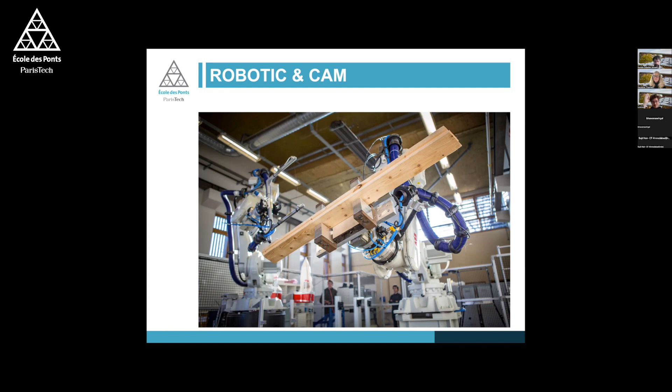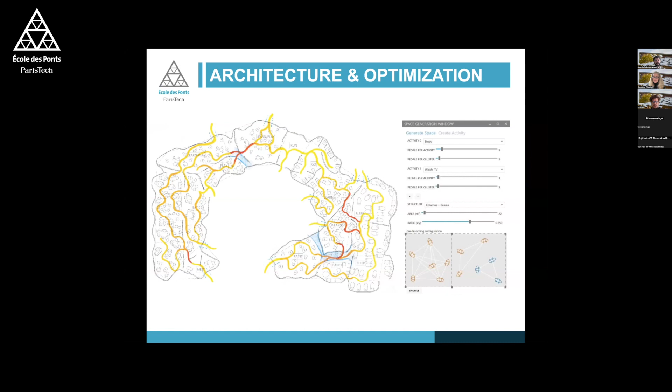to do innovative prototypes for construction. This picture illustrates a very important theme that we call construction-aware design, when we try to ease the construction of complex geometries with the help of mathematics, geometry, but also innovative prototyping. It's also a place where we do architecture in an innovative way. You can see here the results of one student's thesis. That's an illustration on circulation optimization inside the project.

So the master is 1 year and a half, but exactly 1 year of courses. You have first 4 months of full-time courses inside the school to learn the tools and to learn the theory behind all of this. And then the second semester, you go in a company and you work part-time at school 1 week a month to do either computer-aided manufacturing workshops or computer-aided design courses.

So just to give you some examples of what we can do with manufacturing. So there is a workshop on robotics, on large-scale 3D printing, on wood, on innovative assemblies, and something linked to reuse. And we also learn architectural geometry, machine learning, optimization, and innovative structural studies with form finding. So this is just a glimpse of what we do, but I think the best is to let alumni talk about their experience and show what they have been studying.

So Leah, unfortunately, will not be able to be here, but I think we can directly go to Julien, if we keep the order, and if you are okay, Julien.

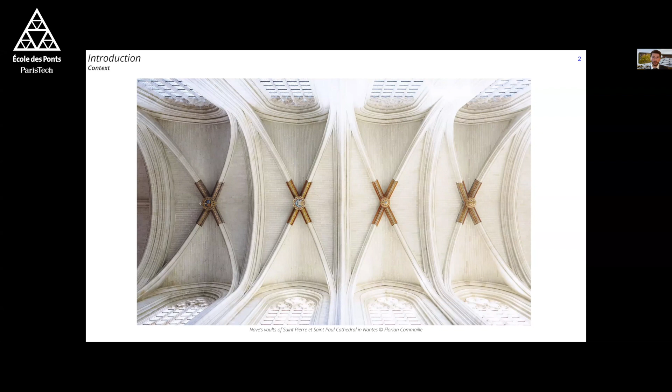For example, with the point cloud, you can have access to very precise geometric information that you can use for your 3D model. For example, on the left, you have the result of a parametric process which takes as input the geometric data obtained from a point cloud and makes it possible to model the geometry of any rib vault and to export it in a finite element analysis software. So you can see this model is really precise in terms of global geometry, but we don't have the representation of each stone, of each ashlar, and so it's not a discrete model.

On the right here, in contrast, you have a work which is focused on discrete structural modeling. However, the geometry of the vault is not based on a point cloud, and the stereotomy is simplified.

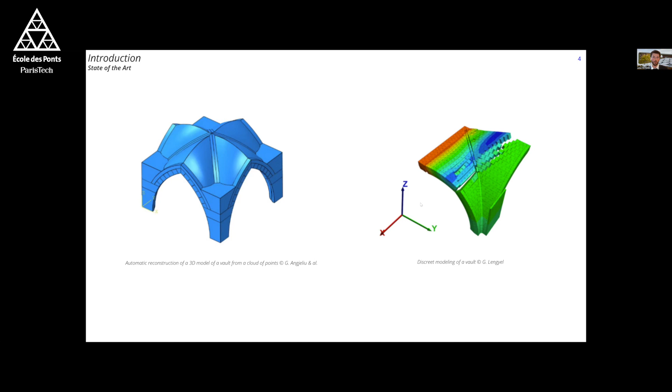And so de facto, this model is aimed at theoretical purpose and is not really suitable for a practical case. So in our opinion, the structural understanding of the vault cannot be done without a geometry faithful to the existing one, like in the model on the left, and also a representation of the stereotomic characteristics or discrete assembly of the vault. And so we worked to produce this kind of model.

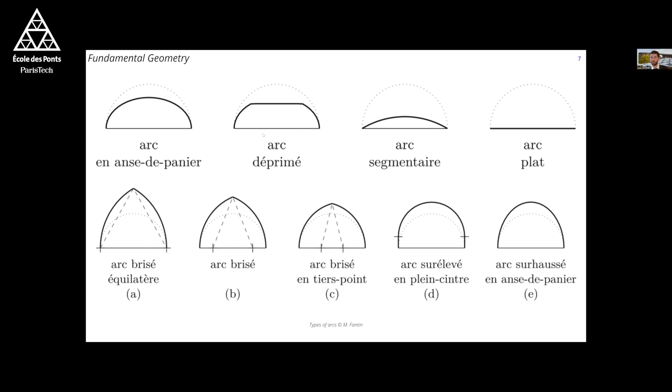So in an ideal case, this geometrical information can be obtained directly from a cloud point, or we can play with a lot of parameters to model different types of vault. So here just an example of the types of arcs that you can find in Gothic construction. There are a lot. And here some examples of the result for the fundamental geometry.

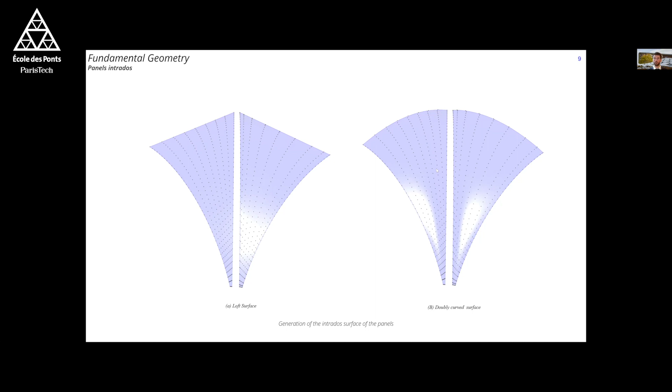So the second step is the modelization of the intrados of the panel, so actually the surface of the web. In Gothic construction, the panels are most often curved so that the block rows form arches, which make it possible to transfer the force of the webs to the ribs while facilitating the erection of the vault. So we implement this in the algorithm by curving the loft surface.

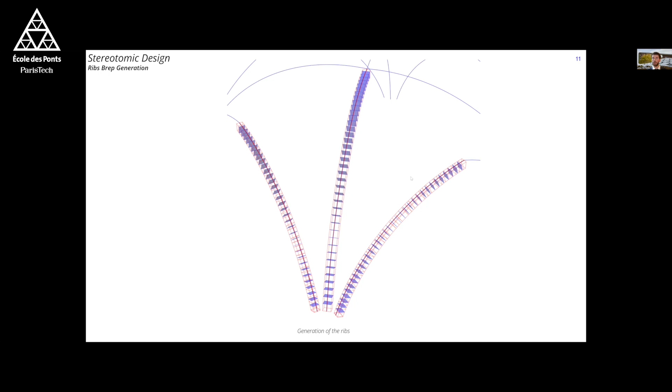And next, we have the stereotomic design. So the first step was to model the voussoirs of each rib, which is not so complex. We have some topological complexity also to take into account, but I'm not gonna dive into this.

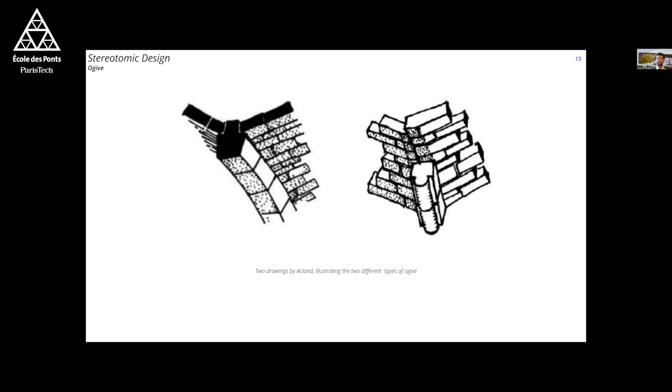And the next step is the question of the ogive. The ogive is the diagonal rib. In the literature, you can find two types of ogive: one with rabbets, and one case on the right, which is the traditional case. I'm gonna focus for the presentation only on the case on the right. The complexity for this type of ogive is the junction of the panels of the webs on the ogive.

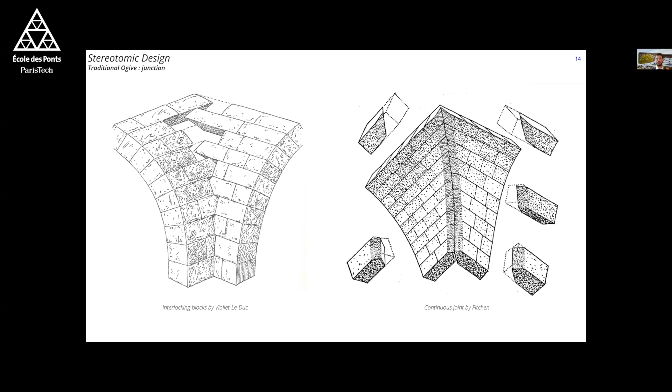In the literature, we can observe some debate. For some authors, the panels meet frontally like this and form a continuous joint. And for others, there is an interlocking system of the stones on the ogive. So to kind of settle this debate, we observed existing vaults and tried to understand how they have been built and what is the stereotomic pattern.

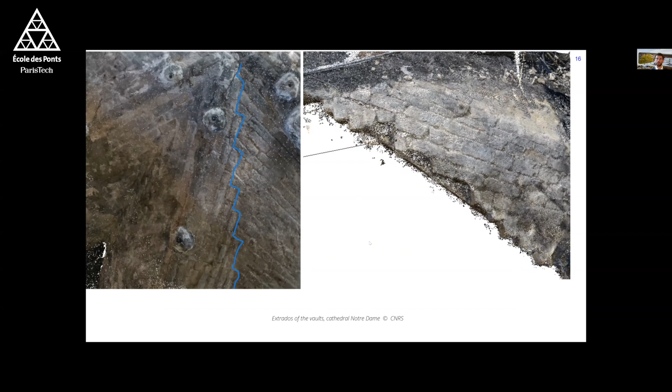So we try to reproduce this interlocking system in an algorithmic way according to local parameters. And finally, we start from this, and we obtain this geometry where we can find the main characteristics that we observed on the existing vault.

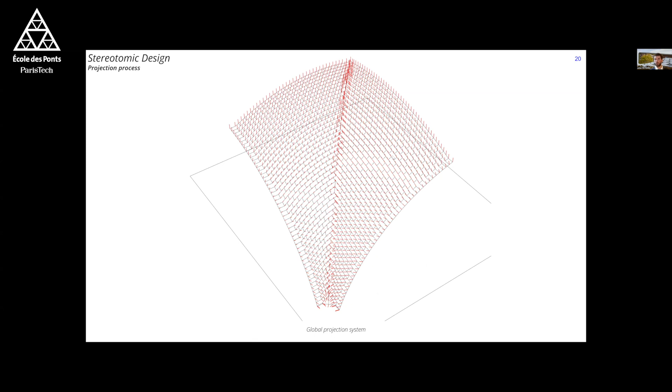Then we start the projection definition. The idea is to define a global projection system in order to obtain a volumic model. We base this algorithm on historical study or on what we observe in the existing. And here, for example, you have the surface of the joint, and finally, the volumic model.

And here an example of an application. So we start from the cloud point. This is the cloud point of the Basilique Saint-Donatien in Nantes that I did myself. So it's not really precise, but it's okay for the example.

And here you have the superposition of the model with the cloud point. So it's not perfect in a mathematical way. I don't run an optimization algorithm to fit perfectly, but we can see that it's quite okay.

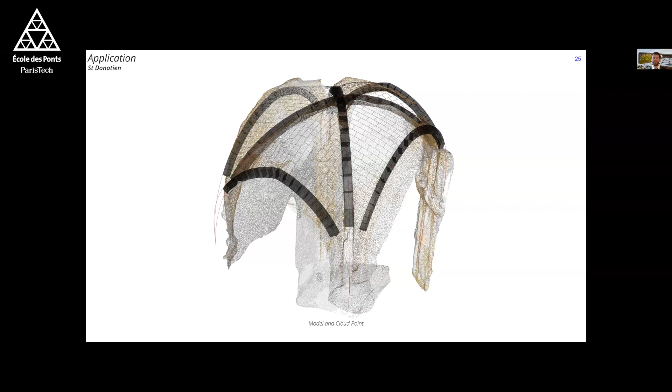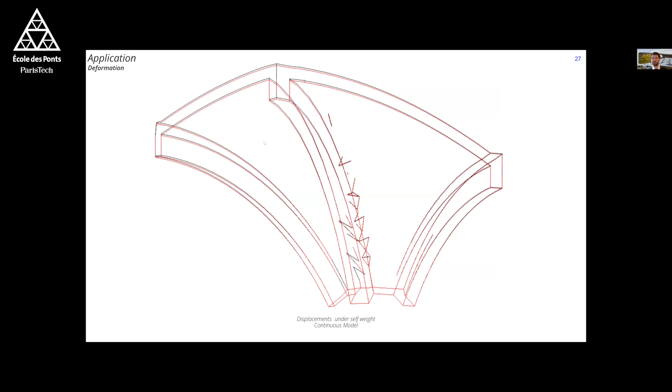And finally, there is export to the finite element software, which is a custom one. Here you can see the meshes of the blocks, and also in red, the meshes of the joints to allow the sliding of the blocks, so a discrete model. And finally here an example of the deformation and the von Mises stress. I have to mention that this is a continuous model because the calculations are quite heavy for a discrete model.

After a few years of being self-taught, I decided to follow an education that could advance my exploration. And so I decided to attend the Digital Building Design Master Program. As part of the master program, I carried out research in collaboration with XtreeE on a 3D printed concrete acoustic wall. The focus of this research was to be able to design and fabricate through robotic 3D printing and computational design tools a self-supporting acoustic wall that improved the acoustic qualities of a room through acoustic diffusion phenomena.

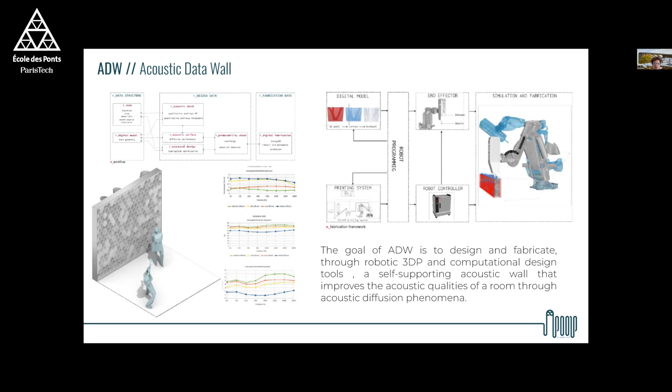Computational design and robotic 3D printing combined in a single workflow enable seamless digital design and fabrication, minimizing errors. Once the design and printing parameters were established, I was able to print a prototype of a portion of the wall in order to validate my investigation. From this experience was born Poolp, for Plastic Loop, a young startup created just under 2 years ago. Poolp has two founders. One is me, and the other is Thomas Sicuri, also an architect and Digital Building Design master alumni.

Poolp was born from a simple question. How do we value the mountain of plastic waste that human activity produces every day? The idea is to be able to use plastic waste as a new raw material, because we are all aware of the problem of plastic waste and its negative impact on our planet and our health. And we are all aware that this problem is largely generated by an economic model, a linear model based on mass production. Poolp, 2022 winner of the best innovation for additive manufacturing, addresses this issue by using plastic waste as a raw material for a circular and sustainable additive manufacturing.

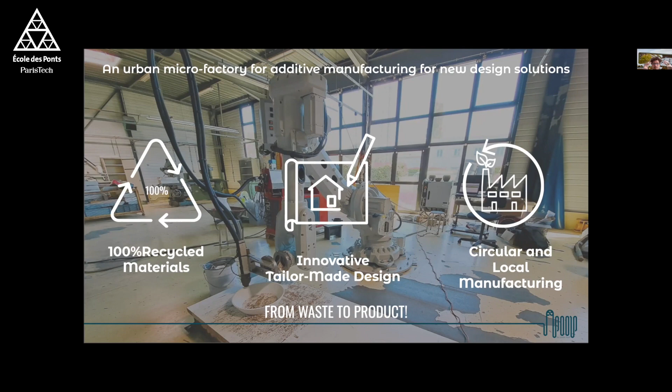Poolp is a new urban microfactory specialized in large-scale 3D printing and ecological transition. The microfactory is a small production center located in the dense urban landscape to boost the local economy and create synergies between the different actors of the circular economy sector. Each microfactory is composed of several additive manufacturing units. It's the 3D printer machine, capable of transforming plastic waste into high value-added products. With Poolp, we want to reshape the additive manufacturing industry, shifting toward a more sustainable and post-carbon future.

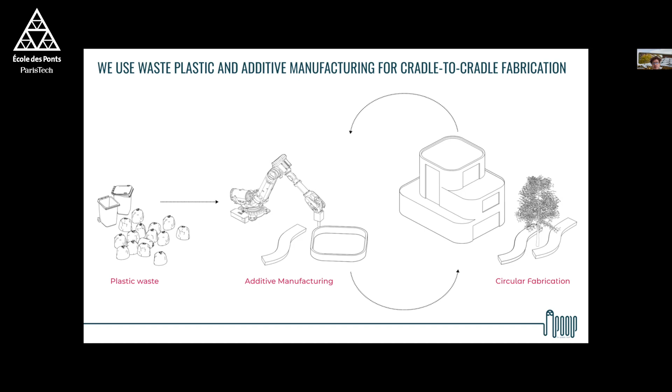We offer a co-design service and fabrication service. We accompany our clients throughout the creative process, from the idea to its realization. We work in synergy with our customers to create a unique solution, designed, tailored and manufactured in France.

Actually, we have realized the first prototype of the additive manufacturing unit, the 3D printing machine. We took existing industrial machines and transformed, adapted, and assembled them to create our 3D printer, which consists of a printer head mounted on a 6-axis robot that, by moving, is able to transform a more or less complex virtual geometry into a real object with precision and speed, and an industrial extruder into which the material is fed.

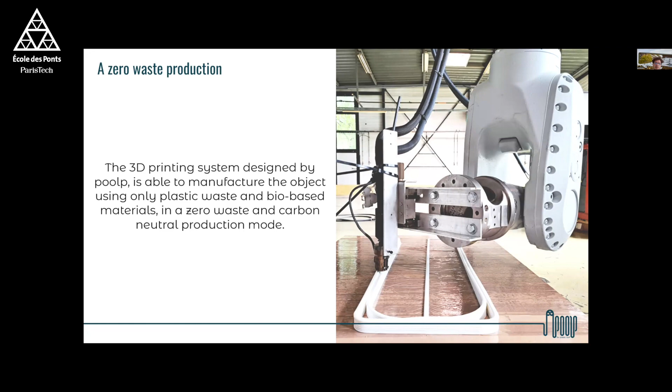This system allows the use of a wide range of post-consumer and post-industrial plastic waste. We can use almost any thermoplastic polymer. Unlike commercially available 3D printers, we don't use filament to print. We directly feed shredded material. You can see this in the photo. This has many advantages in terms of environment and cost, because our material is less processed and cheaper, and we can print faster. Currently, we use mainly post-industrial waste from food and pharmaceutical packaging.

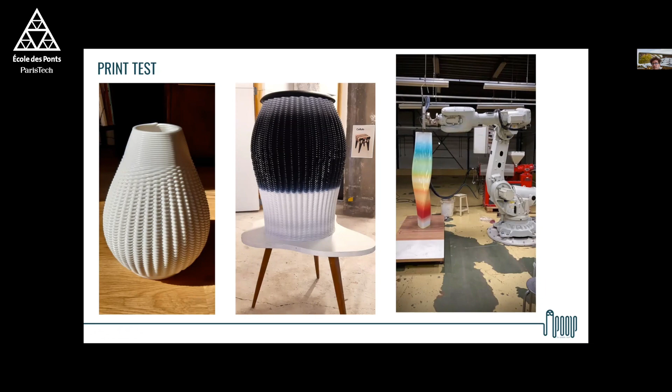Here you can see 3 different tests. These tests were done to find the optimal printing parameters, understand how the material reacts, and also understand the limits of our system. These 3 tests are made at different scales. The first one is 20 centimeters high. The second is double, it's 40. And the third test is the big one, almost 2 meters. It's a lampshade, the last one.

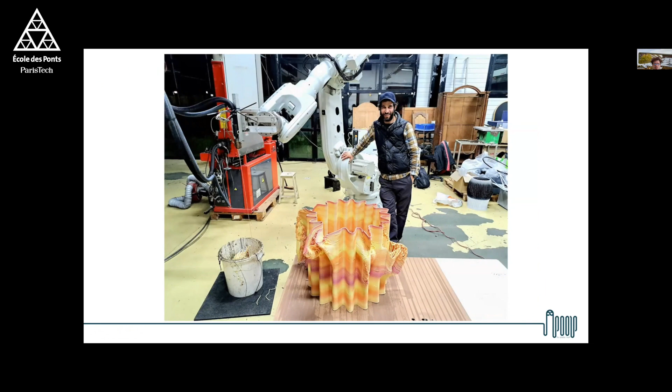Here you can see an artwork we made with an artist in the photo. This work was exhibited at an art festival in the Paris area. You can see the video. It's accelerated. We don't print so fast.

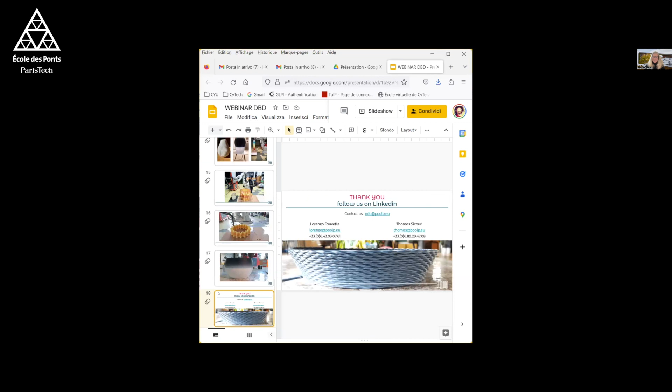So maybe we can keep on presenting unless somebody wants to ask something, but yes, maybe we will have questions by email after this recording. Yes, it's possible for us to answer one by one.

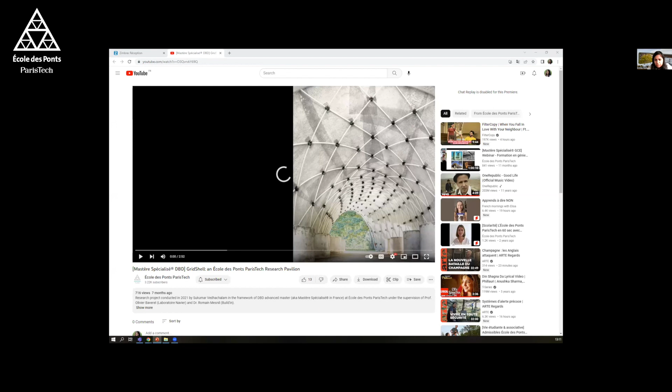Krittika, would you like to? Yes, yeah, of course, I'm here. Yeah, thank you very much. So I'll just share my screen. Just a second. Okay, I hope it's visible. Yes. Okay. All right. Perfect.

I'll go on. Hello, everyone. I'm Krittika Walia. I come from India, and I'm an architect from there who worked in Delhi for 5 years. And after that, in 2019, I came here to Ecole des Ponts to attend digital building design, and I finished my master in 2021. Currently, I'm working at Ecole des Ponts itself at the building co-innovation lab as a research assistant. And today I would like to share my thesis work and my professional journey one year after the master.

So, at DBD, my master thesis was about building a concrete shell using fabric membrane and telescopic arches as the formwork. As we all know, building complicated structures like these, especially with double curvature, is quite difficult to fabricate, mostly because of their formwork system. And since their formwork is unique, it requires a lot of material which generally goes to waste after a single use, and hence it's not sustainable.

So my hypothesis was to have shell forms, especially negative curvature, that can be built out of fabric as a formwork material, and I intend to reuse it. The key features of my project were that it should be a hybrid formwork, because I need to hold the fabric somewhere. Then it should be removable and reusable, of course, and the entire system should have a quick and easy disassembly with simple connection systems.

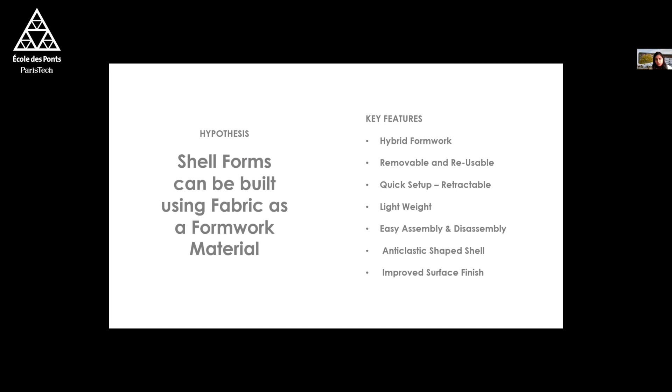So we proposed this idea along with the telescopic arches, which can be smoothly removed from under the built structure, which I'm going to talk about in the next slides. Actually, I'll be showing a video in which it will be much clearer. Next, to support my hypothesis, I developed a basic saddle form, basically 2 saddle forms connected to each other. And I did structural tests digitally in order to check the behavior at different stages.

The first stage was the assembled formwork, which includes the fabric formwork, the telescopic arches, and the cables to counterbalance the entire formwork. The second stage was spraying the concrete over it, so we did tests during that time as well. And third was after the formwork removal, when the concrete was completely set. So the aim was indeed to have a durable structure at the end.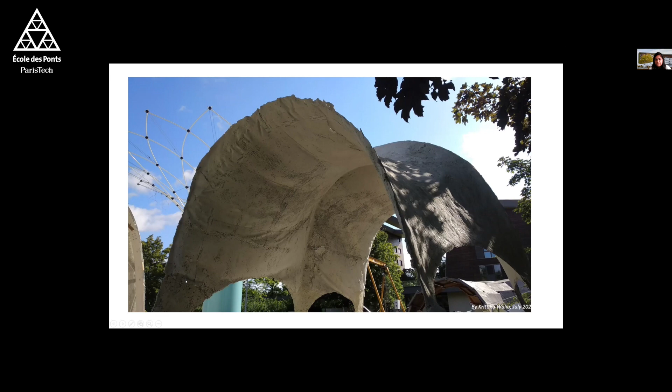I also prepared a catalog of proofs of concept as well, basically more designs that are possible to do with this specific technique and the repetitions that are possible. So it could be a linear format or a polar or rotating format, so an array as well. That is what I was trying to develop, looking from the architectural point of view.

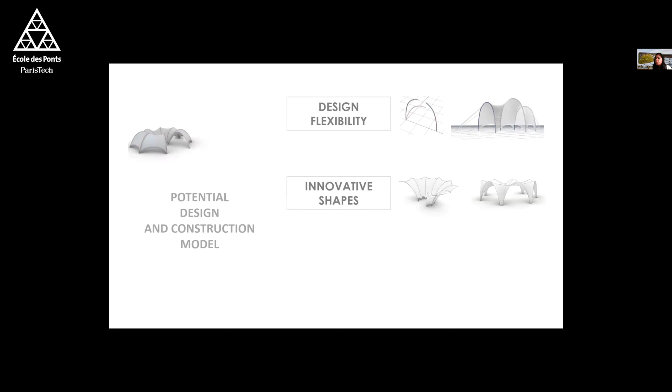So to conclude, I would say that this technique is a potential design and construction model which provides design flexibility, innovative shapes, along with the structural data, especially relevant to a designer. So now you can see the video, which will show better how the telescopic arches work.

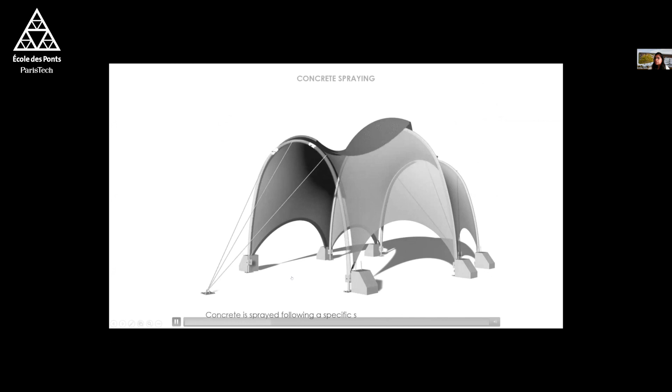So this is how the telescopic arches were coming inside. So it's basically made of a

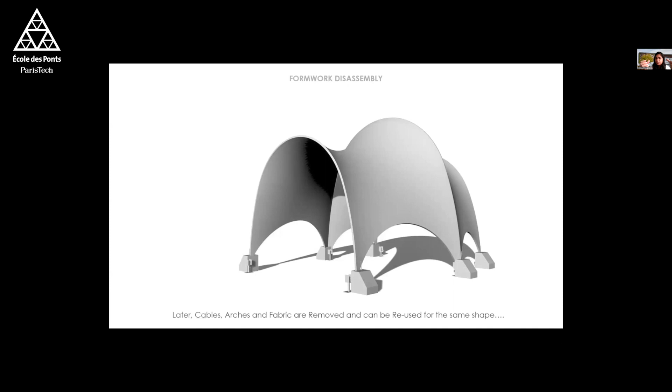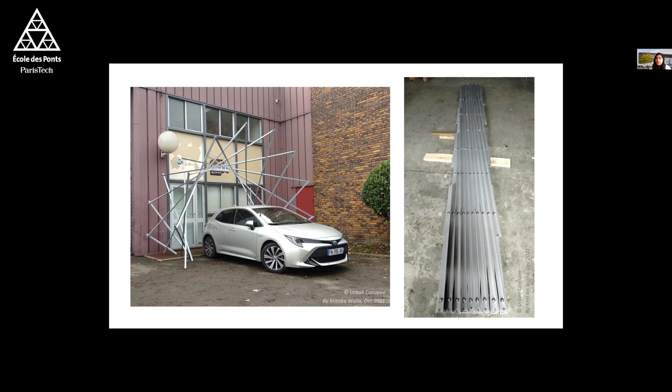So it can be used as a doorway or a porch, that sort of thing. So the prototype that we made was as large as to accommodate a car. And in the folded state, it was not even 50 centimeters wide, and the length was only 2.5 meters, which will be definitely varying depending upon the size of the structure. And it takes only 5 minutes to deploy it on site. So whether you can use it permanently or temporarily, that depends upon the application again.

Secondly, I worked on a conceptual anticlastic pavilion made in a cable net system, which is, again, lightweight and neat and carries huge loads. So for both of these projects, it was highly important to be sure of their load-bearing capacity, and mechanical tests were a great part of the development.

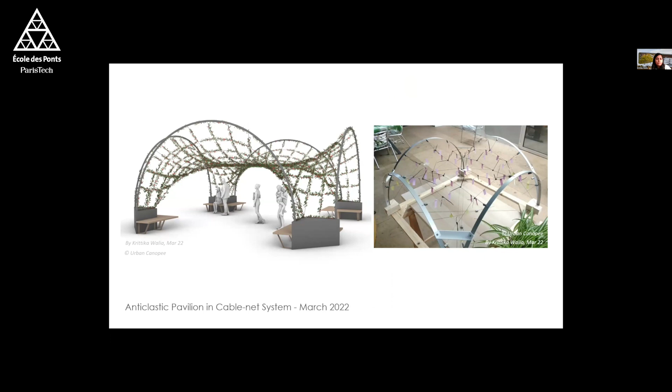So now, as I mentioned earlier, I'm a part of BuildIN Co-Innovation Lab at Ecole des Ponts. It's an R&D platform in digital construction, as Romain also mentioned earlier. And our wide variety of work is based on using robots for construction, for both additive and subtractive manufacturing. And not only that, we love to work with innovative or novel geometrical concepts.

So in September last year, we organized a week-long workshop with a group of students of the ENPC, and this is the same pavilion as our background image. So it was held at ENPC with some students of the school itself and some students of the School of Architecture in the campus. And we built a 4x6 meter huge pavilion with the concept of pseudo-geodesic lines. So it's a specific sort of geometry that is mathematically developed and implied. For now, I'm not going to go into that detail, but I'll briefly talk about the fabrication system.

So it consists of 2 layers of laths, or let's say long, straight planks, which are inclined at a 30-degree angle each to the normal of the base surface. And this mesh is then connected to the wooden periphery around here. And the rotating connector over there at each node, which is now patented, was designed. It's one sort of connector which can be used for all the 150 nodes that are there.

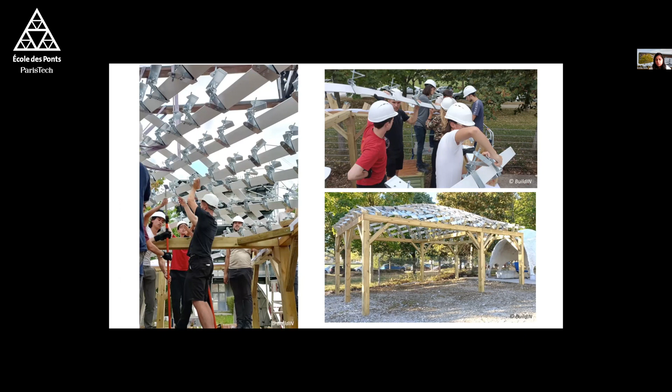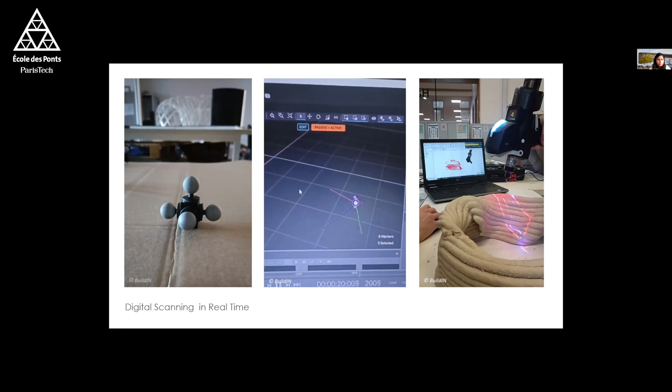I'd like to wrap up my presentation showing one of the projects that Romain also mentioned in his slides. So this was done by the alumni of 2021 itself, Sukumar Vedachalam, and I'm going to show you the YouTube video of his project.

I hope you're able to view it. Yes.

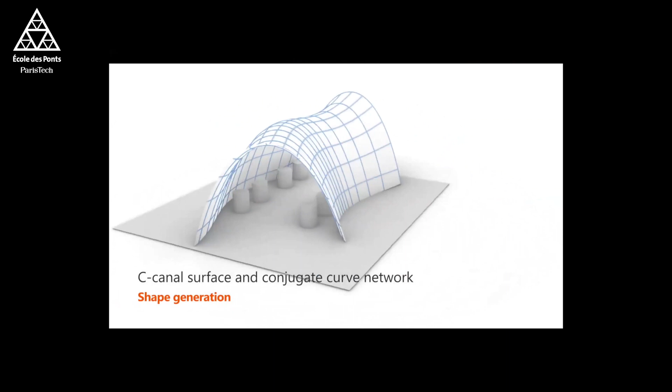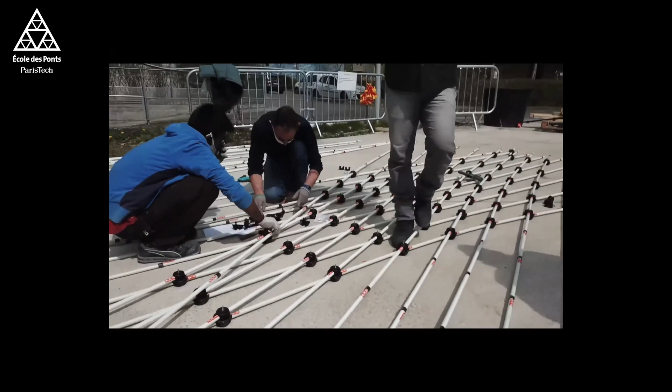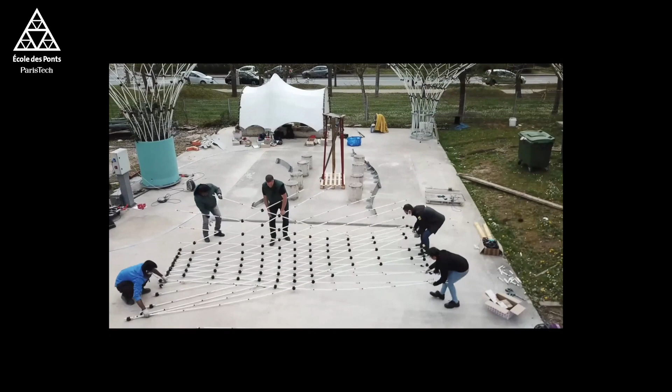So this is how we did the entire grid shell first on the floor, on the ground. We connected it with the special connectors that again come from Urban Canopy. And of course, special coding and everything is required. Then these steel plates were used as the edges to demarcate the shape. Then we put it in place and connected it at the edges to bring it into the correct shape.

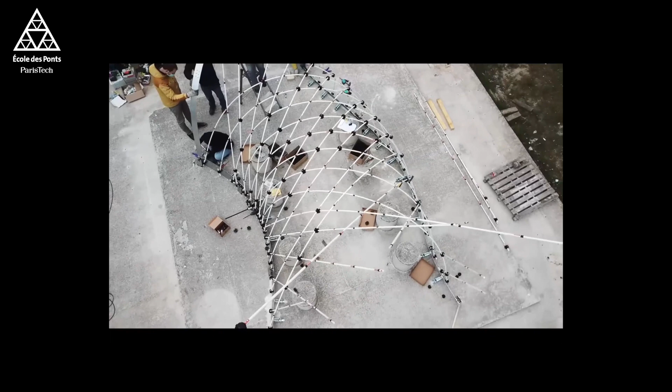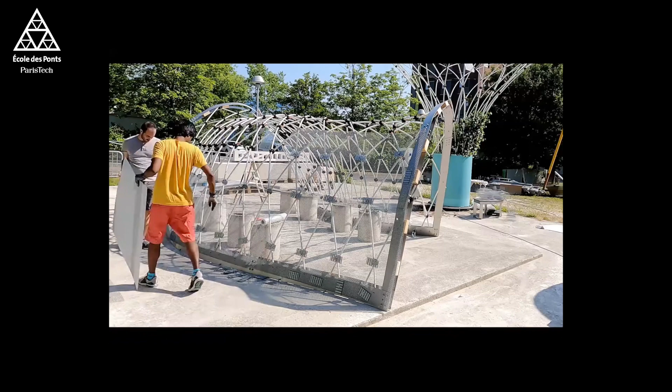So first the grid shell was completed. And after that, the idea was to spray concrete again to make it a permanent structure. That's him. And this part of the video shows how the geometry was developed. And after that, of course, we put the mesh before spraying the concrete.

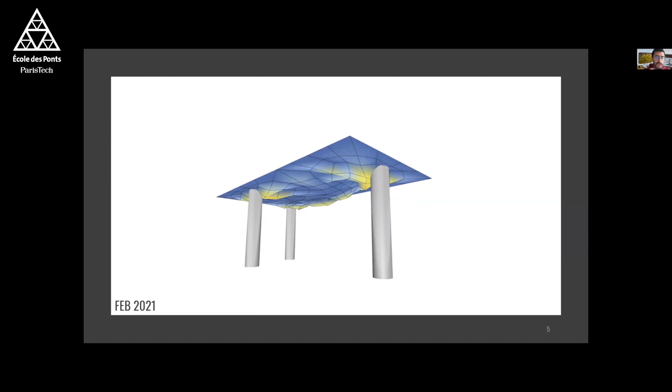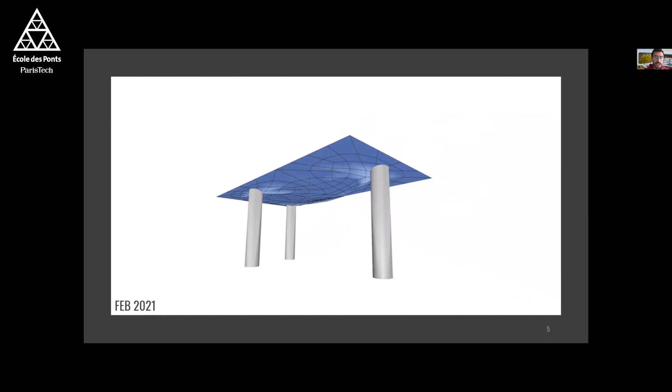So this was my concept, initial concept, to gather some information from a simulation, just to gather some data from a specific structure, and use that data to generate the shape and to inform the shape itself, and then use some kind of digital fabrication method to fabricate this shape, and taking into account, as I said, the different steps of the construction process and how they inform the shape as well.

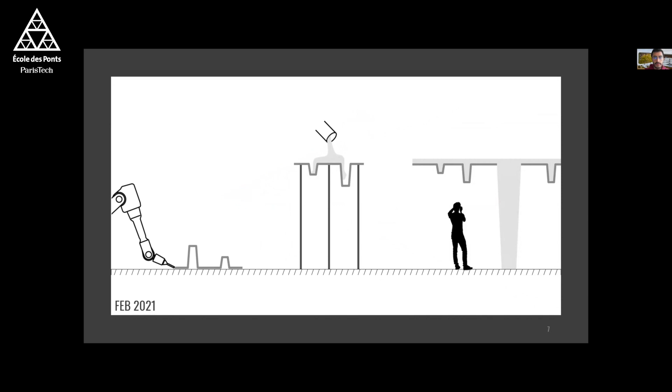So by that time, I started my internship at XtreeE, the pioneering company of 3D printing in concrete in France. Here, there we developed the oriented lace pressing system to print large-scale structures in a workshop, and this technique has a lot of constraints and capabilities to generate and fabricate different kinds of shape.

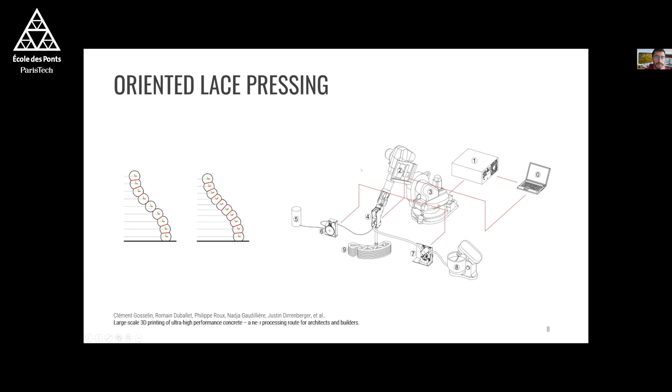So I'm taking into account the possibilities of the system, and I'm also taking into account the building system itself, the limitations and the constraints, as the transport, the shoring, which means how the pieces are put in place for the casting, and then the casting itself.

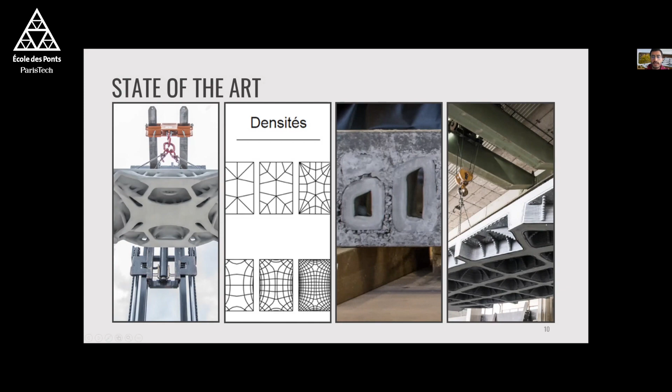Well, in my project, I study and reference many different techniques, like digital fabrication, printed pieces as formwork for concrete structures. Also, the study of different patterns to optimize the shape of the slab, and a recent project from a university in Germany that has a similar approach.

So the design framework I created has 3 main steps. These ones include first the optimization of the shape, then how it translates into the pieces I want to create, and additionally at the end, within XtreeE, with the help of the engineers at XtreeE, I developed a simulation system that takes into account the early age mortar behavior to try to optimize either the shape of the shapes I want to print or the printing time, and to simulate the printing process.

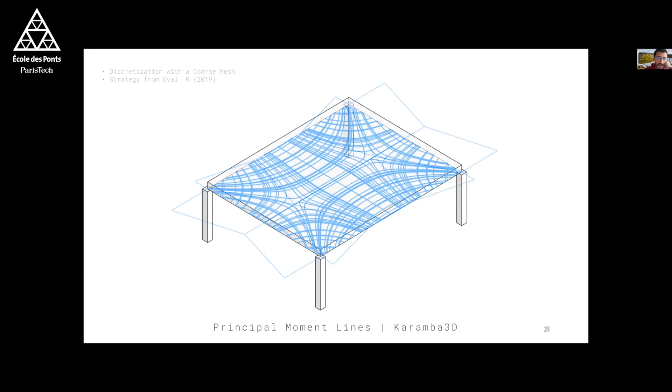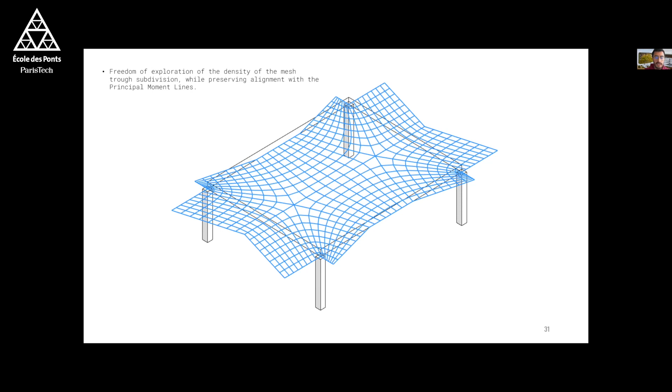So first, I just have a random scenario, which in this case is just a very simple structure. From it, I gather some information from a structural analysis, and I use the technique described by the paper of Oval to recreate the same pattern within a discretized and easy to manage pattern. In this way, I can explore different iterations and different densities of this pattern that I can study and evaluate in order to optimize the structure.

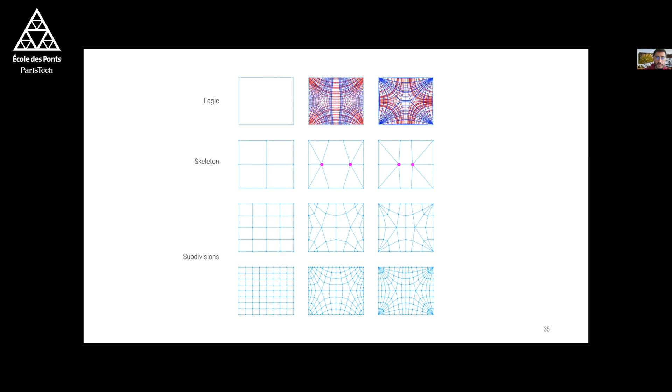So to discover that, I start my exploration. I generate some initial patterns. Then I recreate the skeleton meshes to be able to explore them. And then I generate the different densities for those patterns. Then from those axes, I parametrically generate the information of the finite element analysis.

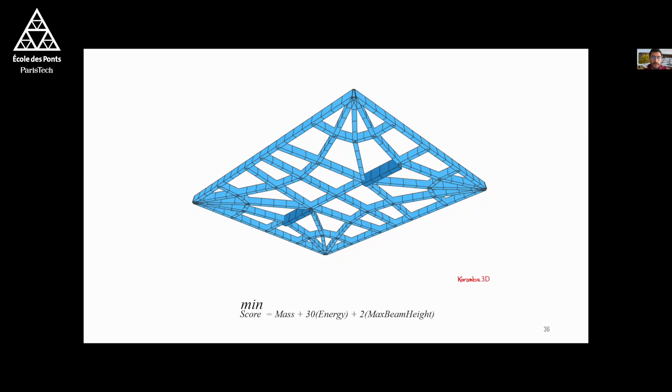And with it, I explore and optimize within some constraints how the dimensions of the beams should be in order to optimize the structure, meaning to have a good stability while reducing the mass of the slab, therefore reducing the weight of the building and the usage of material. And I recreate the same optimization process with the whole spectrum of shapes that I created, that I am exploring.

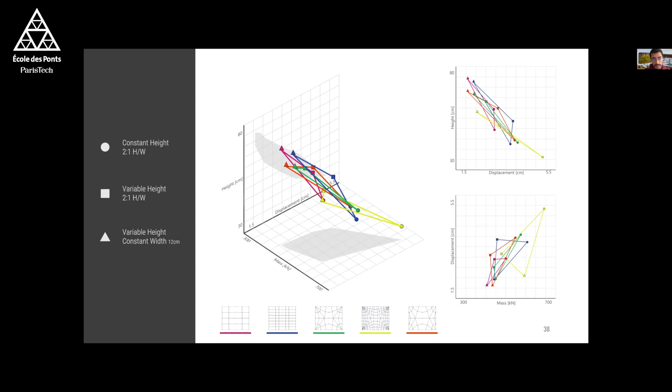But the price I'm paying for that is that I need to increase my height. But in general, I decided that it's worth the extra effort into creating variable height elements, and I will show you then how that informs the shape of the slab and the 3D printed pieces.

So I get the result from my analysis and use the width and the height of each beam as information. What I want to 3D print is the formwork, or the voids, to create those beams that I will then cast in place in situ. So I generate the outer boundaries, the voids, and I allow each wall of the void to have the height of the corresponding beam.

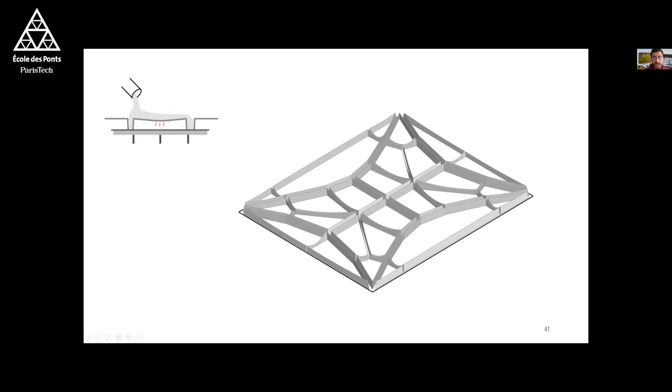One of the first things I take into account is that these voids will be capped. We'll have a ceiling over which I will pour my concrete. So I want to avoid having too much effort on top of it. In order to increase the rigidity of the piece, I will increase the depth and, within the same shape, generate an extra rib to increase the rigidity. So now my piece is stronger.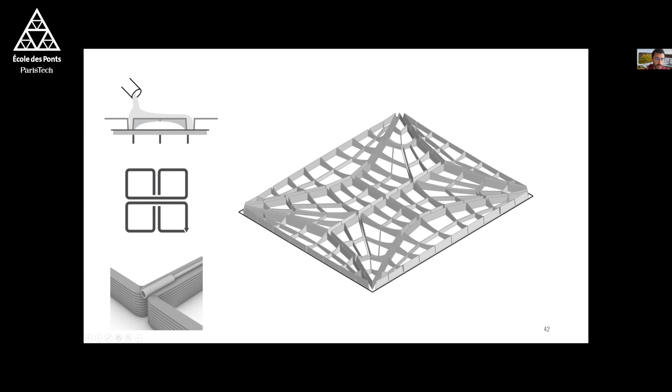This shape is able to respond to one of the constraints of the concrete 3D printing at XtreeE, that it has to be a continuous path. It's not easy to see, but each shape has a single wall that loops around to create the shape. And I'm also starting to think on how to improve that 3D printing process, embedded with additional items that would allow me to pick up and place my pieces in situ.

If you can see the change in the shape from one slide to the other, what I'm doing is also improving the shape of the pieces to be able to increase the printing velocity. This is because the robot can make a more fluid movement, so I can print faster and therefore reduce the time it takes.

And I'm also taking advantage of one of the great capabilities of the XtreeE printing system, that I can print non-planar shapes that have a variable height. So because my beams had different heights, I can adapt to them with my 3D printing system and have one continuous loop that is able to change in height.

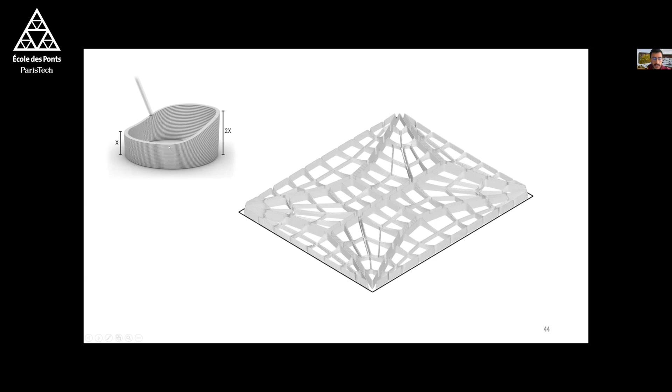So then I get my individual pieces, and I can analyze their structure even more and decide the properties for the 3D printing, in these cases the thickness of the layers. If, for example, I see in my structural analysis that the piece is very stable and not very fragile, I can reduce the thickness of the wall to reduce material and print faster.

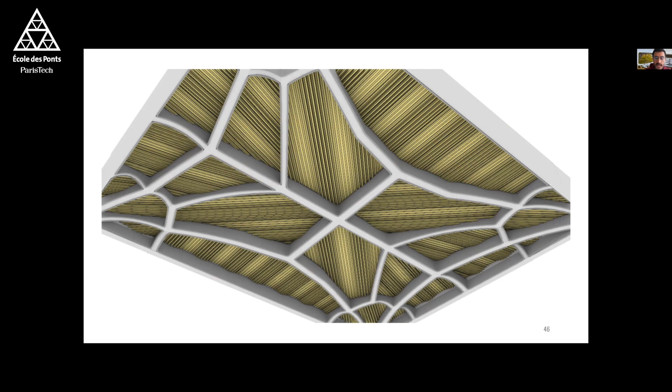As you see, I have just the boundary, but I'm still missing the cap. I didn't go into that in my project, but here I just showed that on top of it we could possibly cap it with an additional element that can be either 3D printed or, in this case, digitally manufactured, and we can add more performance to it, like acoustic properties as an example. So I create these wood elements that I place on top of my pieces, and then I can cast.

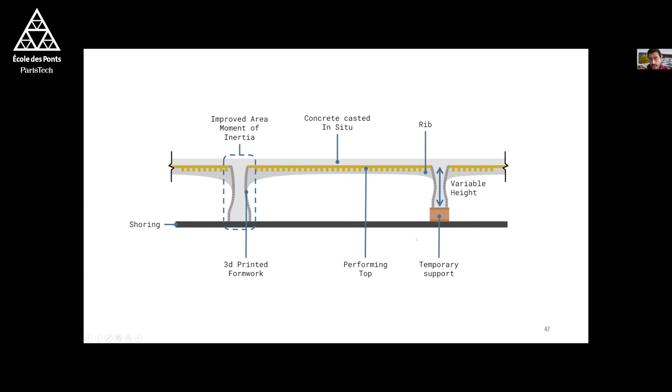So this is a summary of the different elements of my slab. I have the performing top that can be made of wood. This is my 3D printed element with the added ribs. And in light gray, this is my cast concrete. I also show that the different beams can have different heights. And here I need to include a temporary support to be able to place my pieces on the shores, on the building while it's being constructed.

This can also be 3D printed in a more reusable material that is easy to destroy and reuse, like for example clay. So I generate these supports and place them on the shoring for the slab. Then on top of them, I put my 3D printed concrete pieces. When I have that, I can add the rebar for the reinforced concrete. I add my wood panels that have the performing texture below for acoustic performance. And once everything is in place, I can cast my concrete on top.

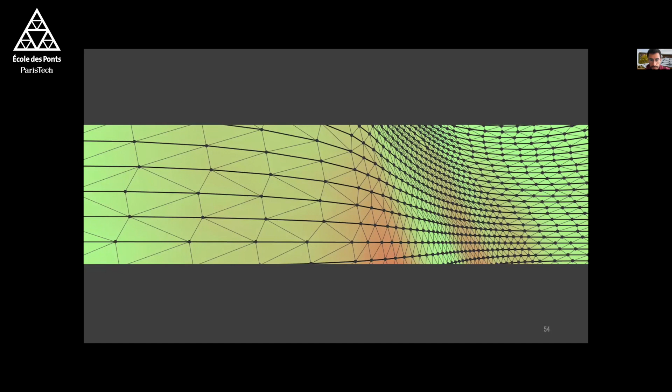So these are the different steps that I just showed. I have the scenario, I get some initial information, I optimize my shape, and then I generate the shapes for the robotic 3D printing. And in order to improve and optimize my 3D printing process, I created the last step of the framework, that is to automatically generate the analysis mesh from the robotic toolpath. And then I use it in my script to assess the behavior of the mortar and the stability of the piece while it is being printed.

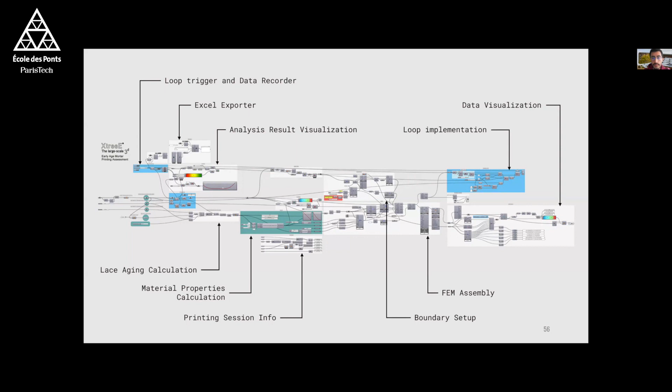So of course, it describes an iterative process where I go layer by layer, studying how the concrete will behave, and whether, while it's being printed, I will have any stability problems. And from that info, I can take multiple decisions about my shape or the printing parameters. For example, I can see that if I increase the thickness of my layer, I can be more stable and possibly print faster. And also, here I see that if I print slower, my piece is more stable.

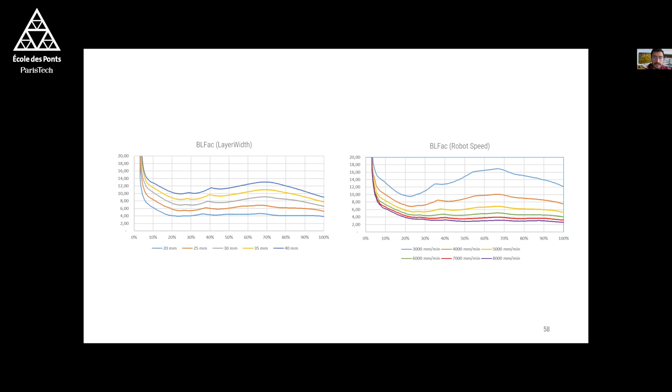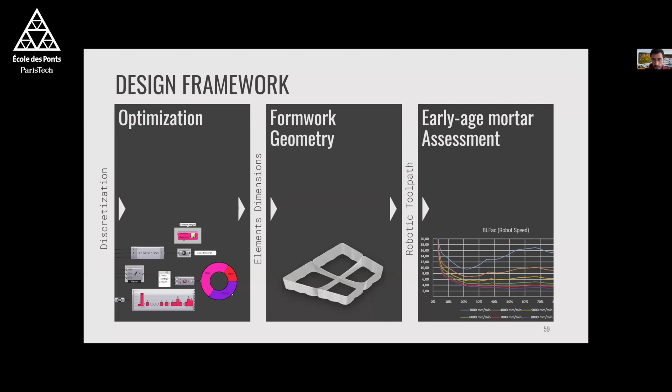So I can have that play: okay, I want to print as fast as possible, so I will increase my layer width a little bit, and then I can print very fast. Or I want to be very stable, so I know that I need to print at this specific speed in order to reduce the material and still have a stable piece. And so, yeah, these are the three main components of the design framework I developed at Ponts along with XtreeE. Yeah, and that's it.

Thank you. Thank you very much, Felipe. Yes. Yes. Bawana, can you hear me?

Is French mandatory to enroll in the program? No, the program is in English. Okay. But I believe for the visa procedures... Answer: French is not mandatory, the program is taught in English, but French can be useful some days. French can be useful to get by in the city, and at the Department of Advanced Masters, we can provide some support to improve in French as a second language.

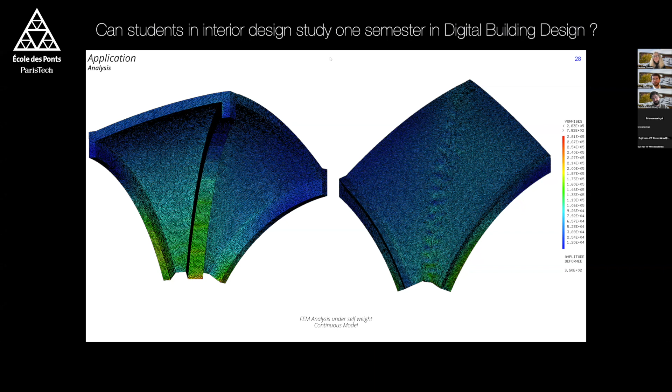Yes, please. Okay. And the second question we have from Ms. Jasmine is how we can collaborate to have our students do a semester with École des Ponts. The students would be bachelors in architecture. And one more question I have from one of the faculty who teach interior design, the space design, at what we call Anand: can some of the students who are interested join one semester or one program in between their studies to do any course in building design or structures or any other thing?

So, sorry, I'm not sure I understand the question. Okay, at Anand we have architecture, and the architecture program in India is usually 5 years. And I believe in France it's 3 years. In between our program, our students go for an internship, working under an architect for a good 6 months. The 7th semester is their internship semester, and their 10th semester is their final year thesis. So is there any arrangement so that any of the students can study for a semester, maybe on buildings or structures?

Yes, I think it would be possible to do only the 2nd semester, but I would say that it is quite difficult for somebody who has not learned anything of this field before. Usually we try to recruit people that have already finished their studies. Okay. What a professional can do is training.